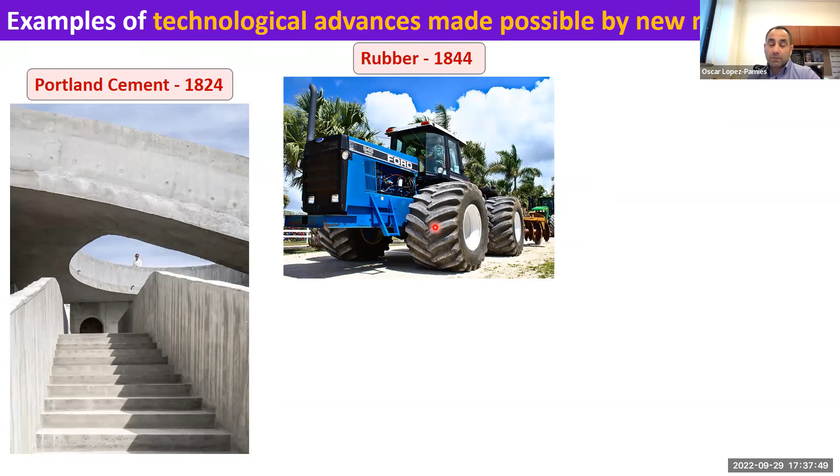Charles Goodyear discovered cross-linking back then, or at least that's when the patent was filed. This is just one example, but there are many examples where elastomers are being used and are enabling new technologies.

And maybe a more modern one is Gorilla Glass, which was invented in the 1950s, but with the iPhone, its application became more pervasive, and it's really everywhere. So, et cetera, et cetera, et cetera - these are just examples that illustrate this key point: in order for us to advance technology, typically we need new materials, or materials that are able to do things that we couldn't do before.

So this is really the driving force of our research. All of these examples have to do with mechanical properties. One can focus on other properties, electrical or magnetic, but the examples I showed you before dealt with mechanical properties. So in today's lecture, I'm going to mostly focus on mechanical properties, and in particular on fracture.

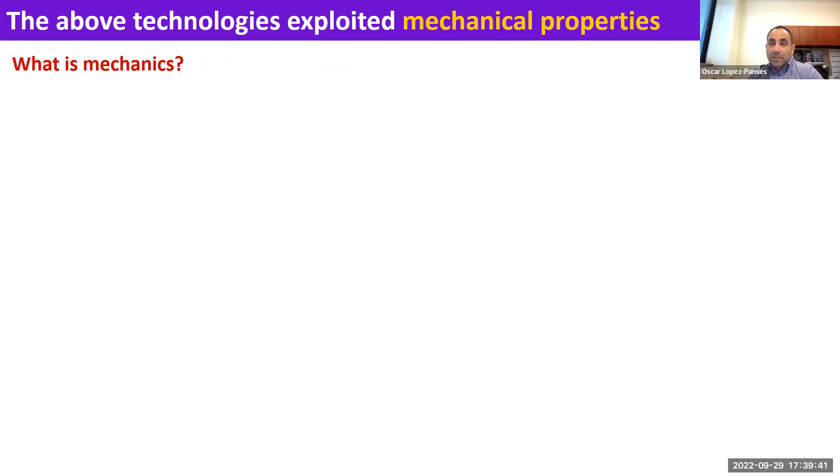And I thought it would be fitting to be careful and define what we mean by mechanical properties, and more generally, what we mean by mechanics, so that we are all on the same page. So what is mechanics? What is the thing that we're after? What is the behavior of materials that we want to understand and exploit to enable new technologies?

So, like with anything, one probably should start with the definition, and I'm going to call that the clinical definition: mechanics is the study of forces and deformations in matter. I'm going to show you a few pictures that all of us can relate to, and that's what mechanics is, really. If you go to Merriam-Webster or any other dictionary, that's roughly the definition you're going to find.

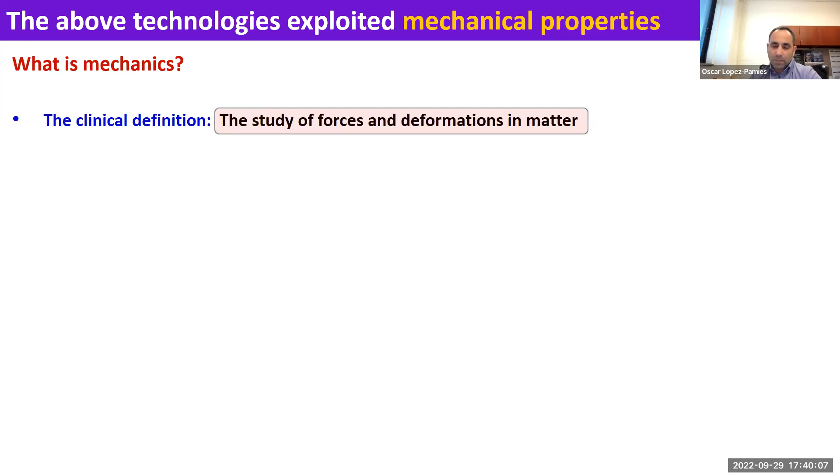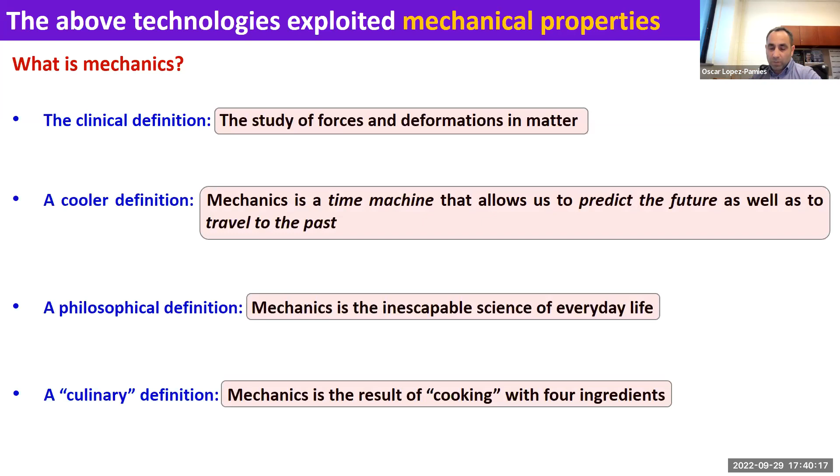But to actually truly understand mechanics in a deeper way, one can come up with more exotic definitions, and I'm going to go over 3 other definitions. This is going to help us understand at a deeper level what we mean by mechanics and why it's of interest to study. So the clinical definition again: the study of forces and deformations in matter. These are just a few examples - this is me stretching a rubber band.

I'm sure many of you do this, maybe even daily. This is just a very relatable problem where you take a structure made out of some material, you stretch it, you deform it, you apply forces, and it deforms. Mechanics is about understanding this process. Forces applied to matter induce deformation.

We can think about anything made of matter that is subjected to forces, which is pretty much everything. This is the Eiffel Tower, shown here with some artistic license, highly deformed, just to drive home this idea of deformation. Of course, the Eiffel Tower hopefully doesn't deform that much, but it deforms quite a bit.

When I was young, I used to play tennis, so I like this picture to drill down this notion of deformation and forces. This is a high-speed camera shot of what happens when you strike a tennis ball, which is a spherical shell, with a tennis racket, and you can see the very significant and complex deformation that takes place.

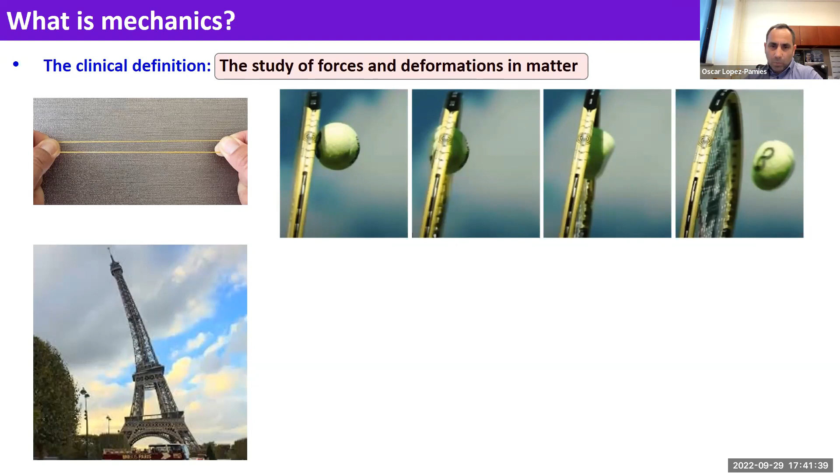One thing I'm going to focus on today is when you subject matter to exceedingly large forces or exceedingly large deformations, matter may fracture. It may crack, and then the structure breaks.

I included two pictures here. This is happy fracture - this is what you're supposed to do when you buy a yacht, you break a champagne bottle. I wouldn't know. And this is a less happy fracture - this happens quite often. So these are examples that structures are everywhere, and at some point they may break.

I'll come back to this point later.

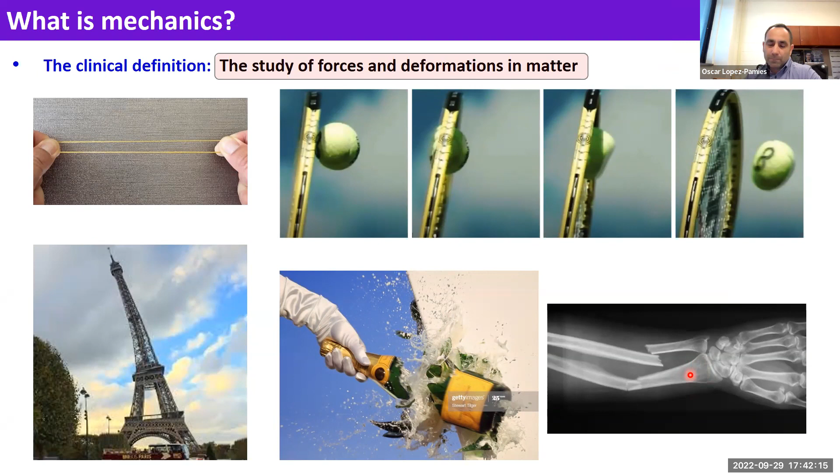All right, the second definition is related to why, more clearly than the first definition, we want to study mechanics. We can think of mechanics as a time machine, and we can think of any theory, if you like, as a time machine that allows us to go to the future.

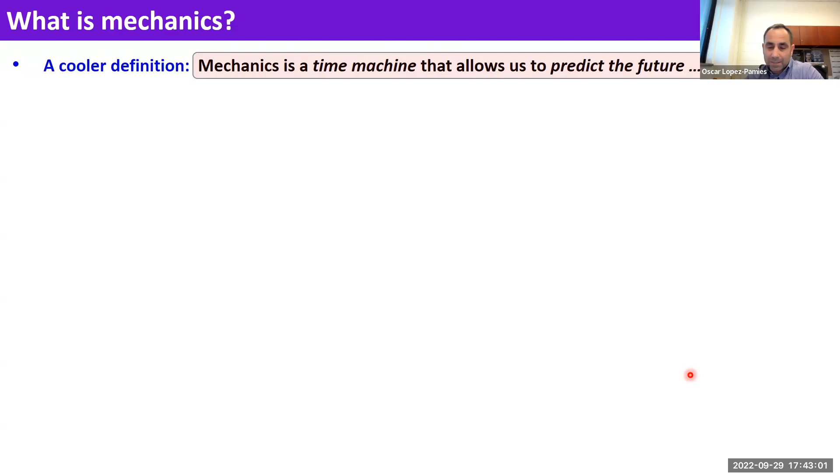If we have the equations that describe the mechanics of structures, certainly we can predict the future. We can figure out how things are going to behave before they are built, under any circumstance, and that's why we use mechanics to design whatever it is that we want to design. So we can think of mechanics as a time machine, and here's a couple of examples to illustrate this idea.

Can we predict the force required to break the dome? And if you break the dome, what is going to happen? How is the structure going to shatter, for instance? So this is the idea.

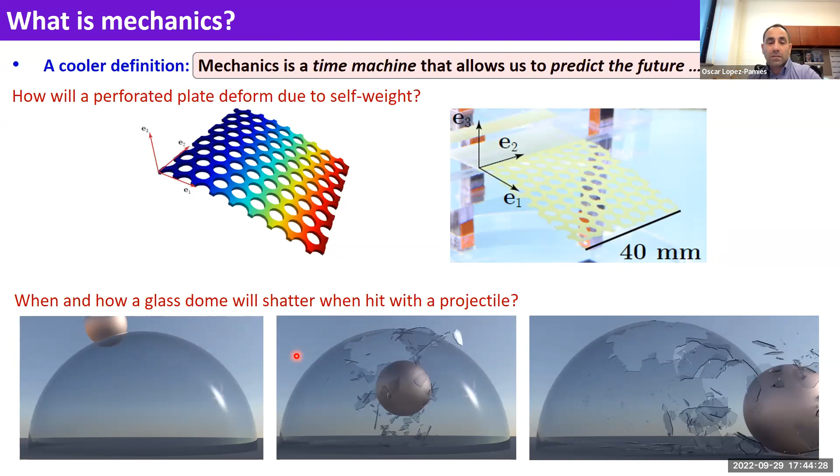If we have this knowledge, if we have a theory, a set of equations that describe how structures behave mechanically, we can predict the future. We can design structures for any purpose. That's the power of thinking about mechanics in this way.

Another very important aspect of thinking about mechanics as a time machine is that if we can go to the future, we can also travel to the past. And this is nothing but forensic analysis.

Whether we like it or not, accidents happen, and we need to figure out what went wrong so that it doesn't happen again. This is the collapse of a bridge not far away from here, the Interstate 35W bridge, next to the University of Minnesota in 2007.

The bridge collapsed and 13 people lost their life. And there was a huge investigation, as there's always an investigation in these cases, to figure out what went wrong, to see if there were other bridges in danger of meeting the same fate.

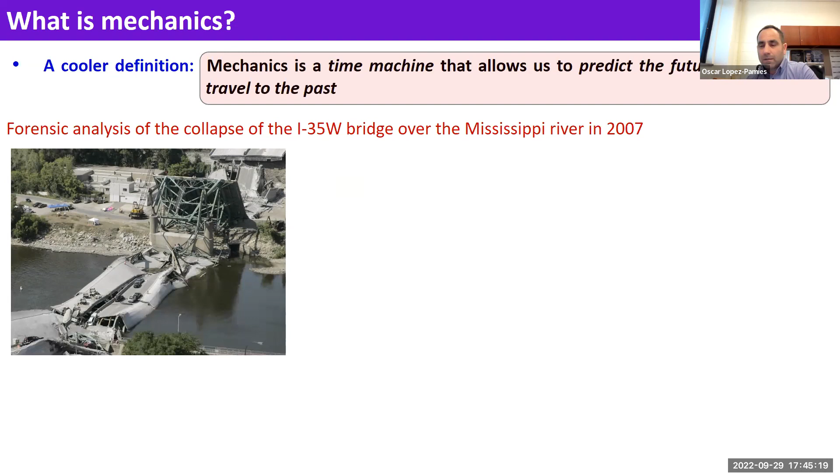And it turned out after a year and a half that they figured out what went wrong. What went wrong is one of the gusset plates was buckled during the fabrication of the bridge, when the bridge was put in place. And it was this buckled gusset plate that gave way and actually resulted in the collapse of the bridge.

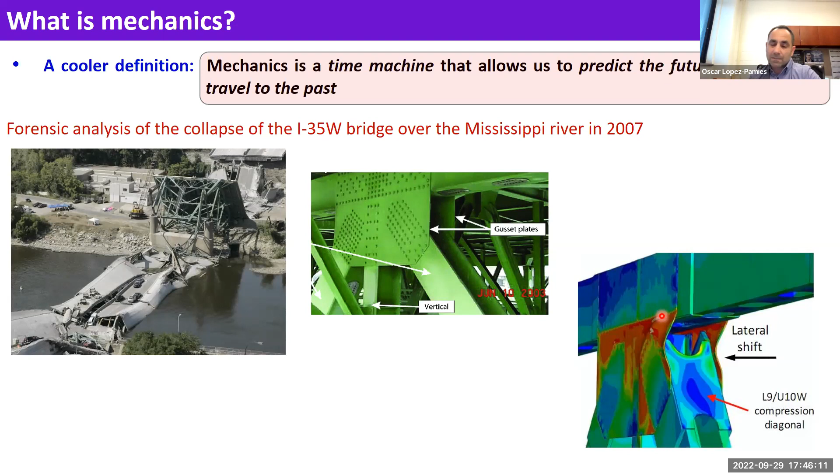This was possible because, as you can see here, this is a simulation. This was possible because we have the equations of mechanics for this structure, for this material, for this steel in particular, and therefore we can actually accurately, with equations, determine how this behaves. And that's how we can use these equations or this theory to go to the past and do some forensic analysis.

So I went through two of them, right? The cooler definition, time machine, now a philosophical definition. When one thinks about mechanics, we can argue rather philosophically that mechanics is the inescapable science of everyday life. And what I mean by that is that we are constantly surrounded by mechanics.

Here are just a few examples. I'm not going to go over all of them, but I'll go through one. You can read the others. Every time we take a breath, our lungs deform, they inflate, they deflate, right? That's mechanics right there. And everything that's around us is made of matter. Matter deforms when subject to forces, and that is exactly mechanics. So it's really truly we are surrounded by it, and that's why it is to our advantage to understand it.

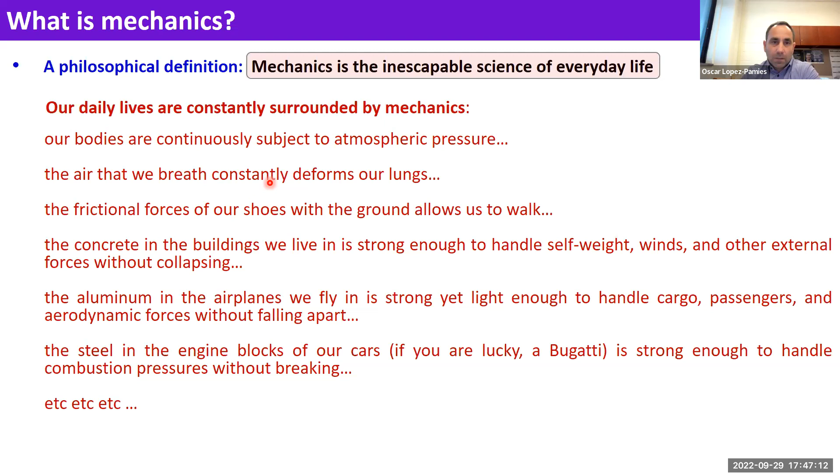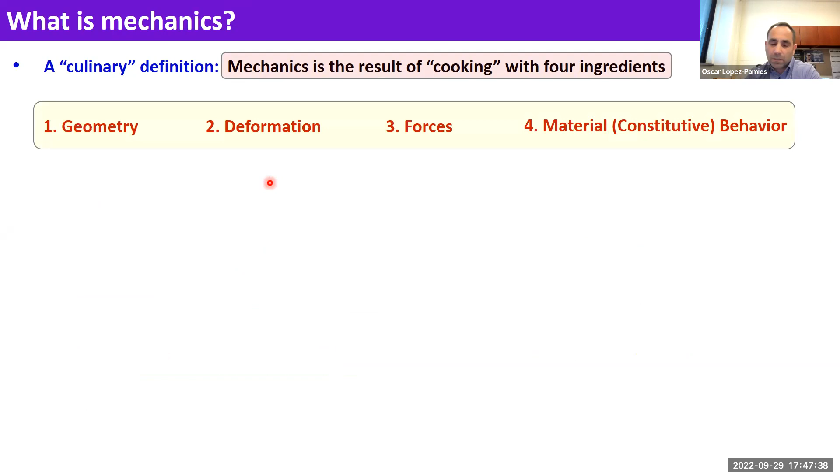And then finally, the definition that is going to get us going with fracture and the things that we've been doing is what I call the culinary definition. So mechanics can be really thought of as cooking, with 4 ingredients. So there are 4 ingredients. These are them: geometry, deformation, forces, and material behavior. And this explains what I mean by this.

If you think of your favorite structure, anything that is made of matter, you can think of something like the Eiffel Tower, a typical structure, or you can think of the human heart. Anything that is made of matter occupies a domain in space. So that defines its initial geometry. That is ingredient number 1.

This initial geometry deforms. And think about the rubber band. You apply forces, which is another ingredient. The structure with initial geometry deforms. And how it deforms depends critically on what material the structure is made of. So we can think of these 4 ingredients one at a time separately.

And as it turns out, we know now, we have understood completely, fully, the first 3 ingredients. There is nothing that we do not know about how to describe geometry, deformation, and forces. There is, however, an ingredient that, even though we have made quite a bit of progress, we really don't understand, not even close. I mean, this is where all the research is taking place. That is the 4th ingredient, material behavior.

How do we describe, with equations or with experiments, in a quantitative manner how matter behaves mechanically? When you subject it to an arbitrary load, can we say very precisely in a quantitative fashion how this piece of matter is going to behave? And that is actually a difficult problem. I'm going to be telling you a little bit about that, focusing on fracture, which is particularly challenging.

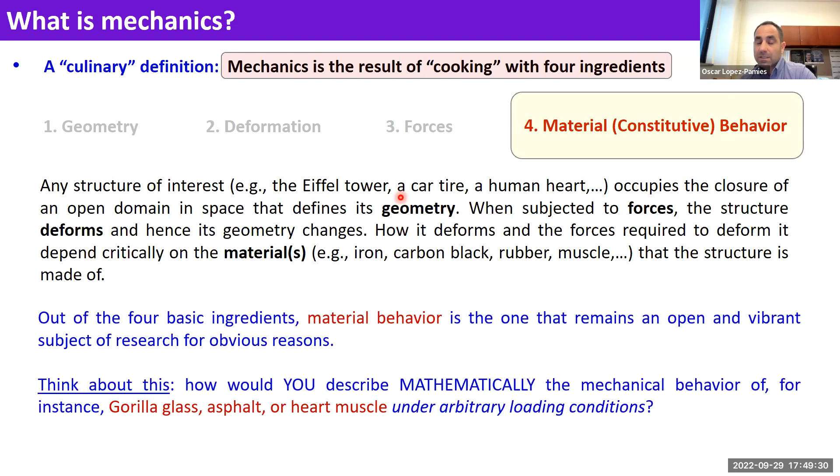So with that preamble, let me tell you what this presentation is going to focus on. It's going to focus mostly on the mechanical properties of solids that we use for structures. And in particular, we're going to look at the fracture properties of solids. And as I mentioned, this is challenging and it's going to become apparent, I'm sure it's already apparent, when you think about things breaking.

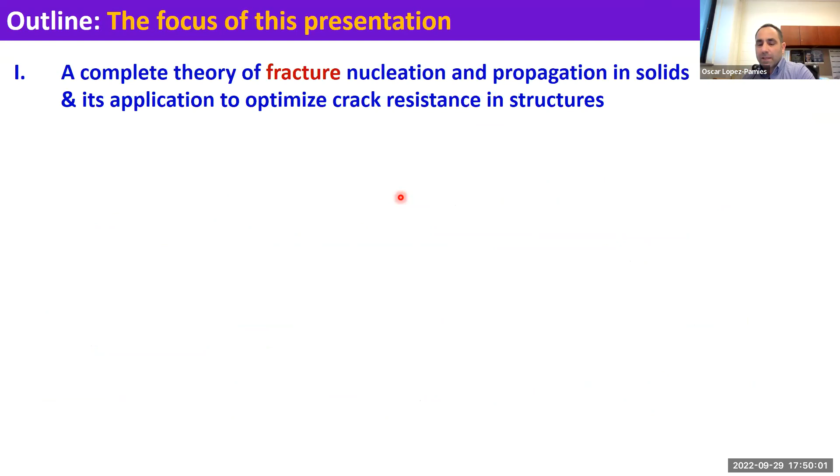Then I will tell you a little bit about some of the directions, these are different properties. So I'll tell you a little bit about solids that contain liquid inclusions and why these are very exciting materials and what is it that we can do with them. So these are the two examples. And finally, I'll tell you about a new program that is related to all of this that we have just started this semester here in the department, the EM(MA)T program.

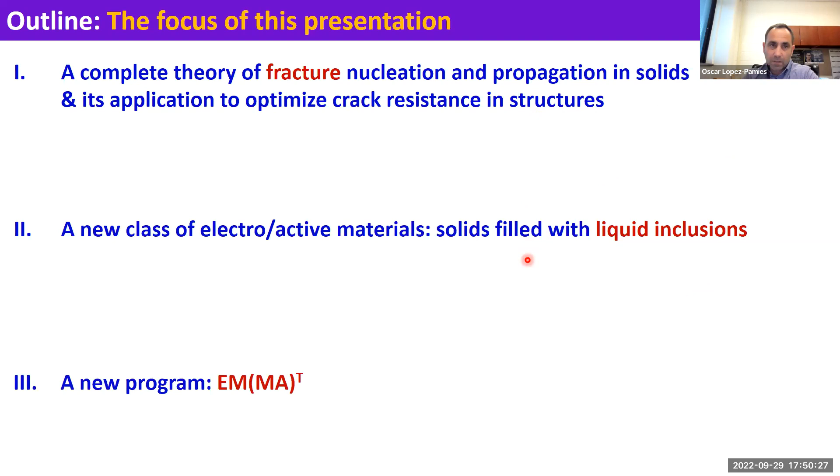All right, so the pervasiveness of fracture, I couldn't help myself. So I'm going to include again some pictures, but I really shouldn't, right? Because fracture is so very pervasive and it's so very familiar to all of us that it really doesn't need an introduction, but still, I couldn't help myself. And I included the following.

Benjamin Franklin famously wrote to a friend of his in Paris, where he spent a lot of time in Passy, serving as a sort of ambassador. In 1788, the US Constitution was ratified, and soon after, Franklin wrote the following, which has become famous: our new Constitution is now established and has an appearance that promises permanency, but in this world nothing can be said to be certain except death and taxes. This took off, and we still use it on many occasions.

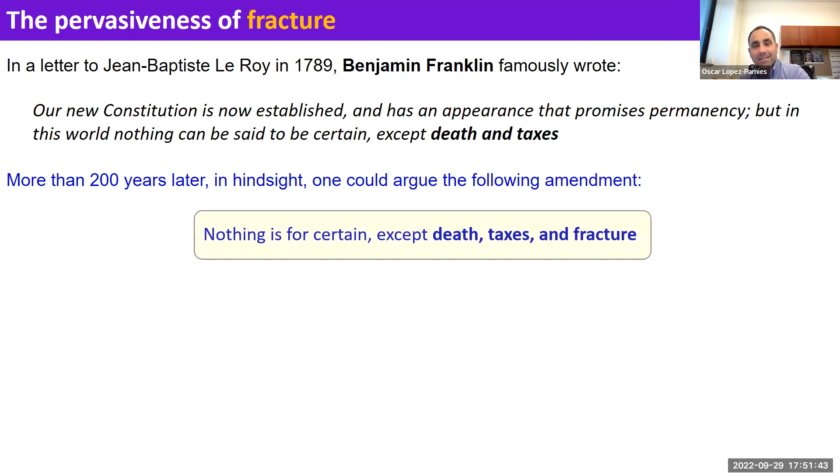More than 200 years later, in hindsight, one could argue the following amendment: nothing is certain except death, taxes, and fracture. And indeed, everything breaks. This is something exceedingly important for us to understand, and by understanding I mean quantitative understanding, very precisely.

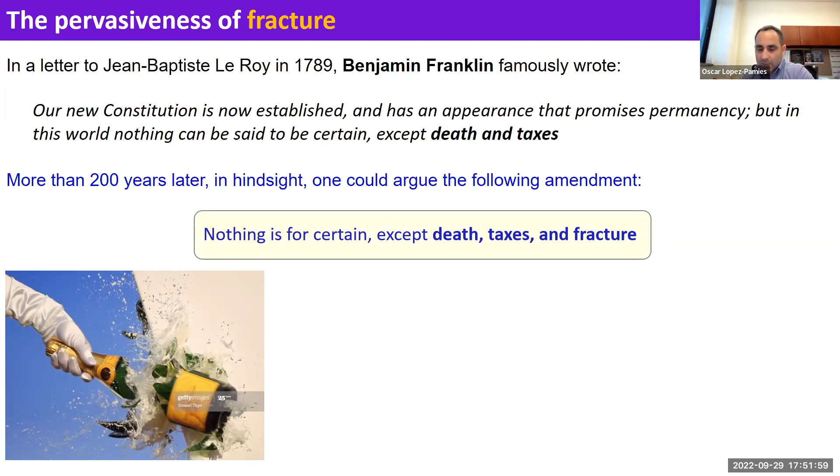So I already showed you these couple of pictures. Happy fracture, maybe not so happy, and this is certainly the other extreme of happy. Accidents happen. This was the fracture of a bridge. Six people lost their lives in this accident because of cracks in this bridge, which was at Florida International University in Miami.

But these are just three examples. You can think of infinitely many more. So fracture is an exceedingly important aspect that we truly want to understand.

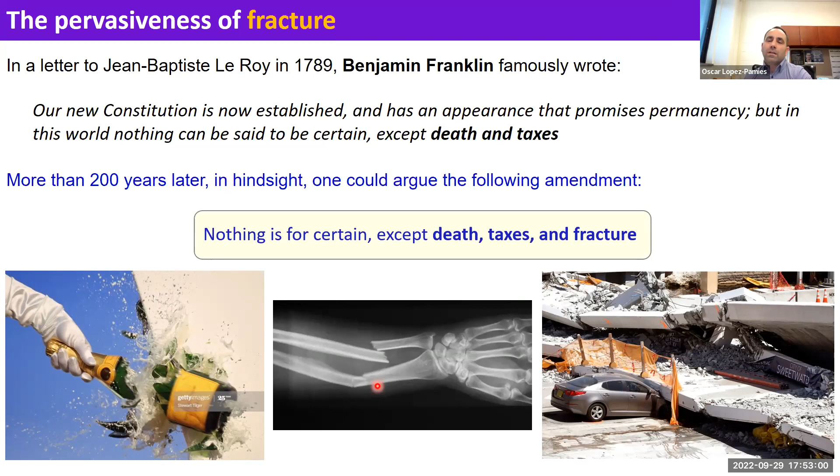So what I'm going to show you is our current understanding of fracture. We have recently developed a theory that we believe allows us to predict everything in terms of nucleation and propagation, at least in some classes of materials, brittle materials, but not only. Then I'm going to tell you what we can do with this knowledge, and how it can be used.

I don't want to be too technical, but I thought it would be important to go over how we developed the theory and the steps we followed to get there. For that, I'm going to show you what we know from experimental observations about fracture, which has been reported over many years, in fact more than a century. So I'll tell you about the key features of fracture, and then briefly show you a theory that can supposedly predict all those observations.

Something we can use to design or do forensic analysis. Then I will show you a couple of applications, and finally how we use this theory to design new structures that are optimized in some sense for crack resistance. All right, so the first view of fracture.

You may be familiar with a classical book by Love, published at the end of the 1800s on elasticity. There is a chapter where it's very nicely summarized what was the state of the art at the time about fracture. Just to put things in perspective historically, the notion of stress was introduced by Cauchy in 1823. Soon after, with a clear understanding of stress in materials and structures, people started thinking about what happens when things break.

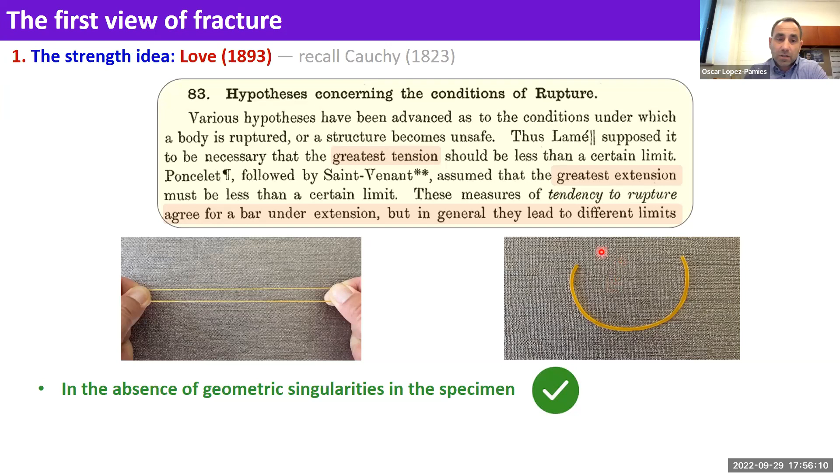They realized that this is great if there are no singularities in the structure. If you start to consider structures with sharp corners or with cracks in it, these fail miserably. The reason being is that if you have a geometric singularity in a structure, this implies that the stresses...

...are infinitely large at the singularity, right? If you think of a sharp corner, the stresses there, the moment you touch it, are infinitely large, which would imply that it should break right away, but that is not what happens, right?

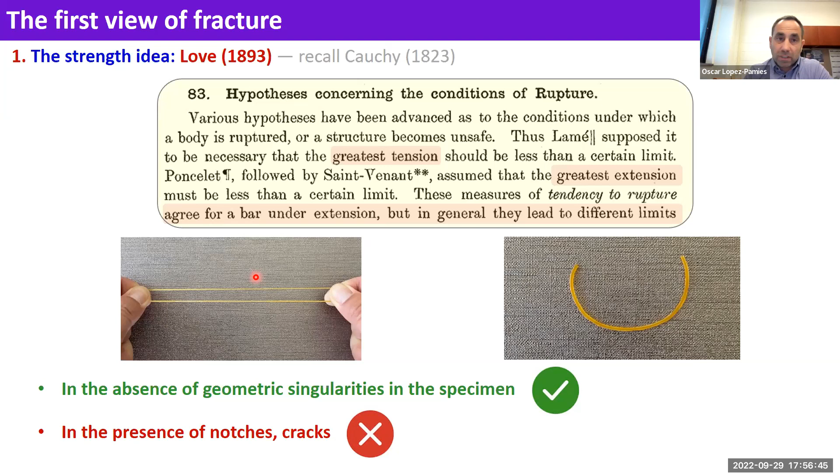So this idea worked, but only worked partially. This was in the 1800s. Then along came Griffith, in 1921, several decades later.

And then he said, actually, strength is not what happens. What happens is a competition of energies.

If you take a piece of material, the material may fracture or not, depending on a competition between energy of deformation and energy that is associated with the creation of surface.

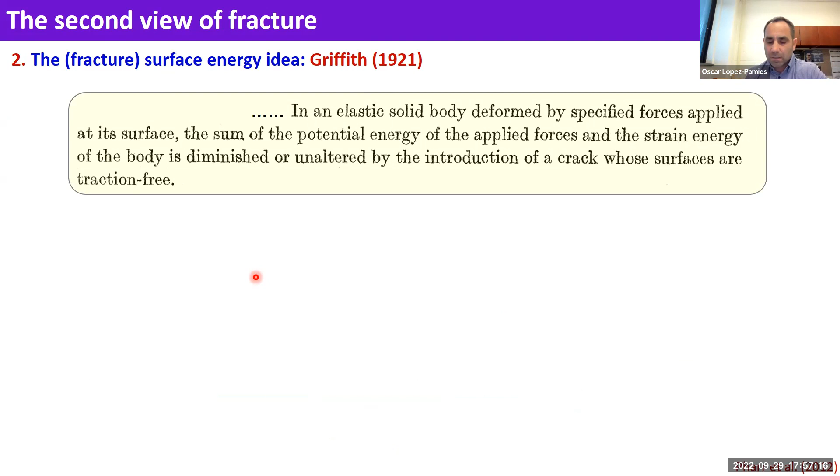And actually, this works great, but this only works great when you have a crack in the specimen. So think of a tape, think that you are going to cut it with scissors and therefore put a crack. This is a very singular feature, geometrically speaking.

And when you pull on it, at some point, the crack is going to run. And Griffith explains this.

So this is great, except that it's not so great because it's not explaining the previous case that I showed you about strength, right?

If you apply a force to a piece of material, let's say tension, it does not follow this. Fracture will not happen according to Griffith, it would happen according to strength.

So essentially what we have in this 1921 year is that we have two limits. What happens to a structure that has no singularities, geometrically speaking, that is strength. What happens to a structure that has a crack in it, that is Griffith. And...

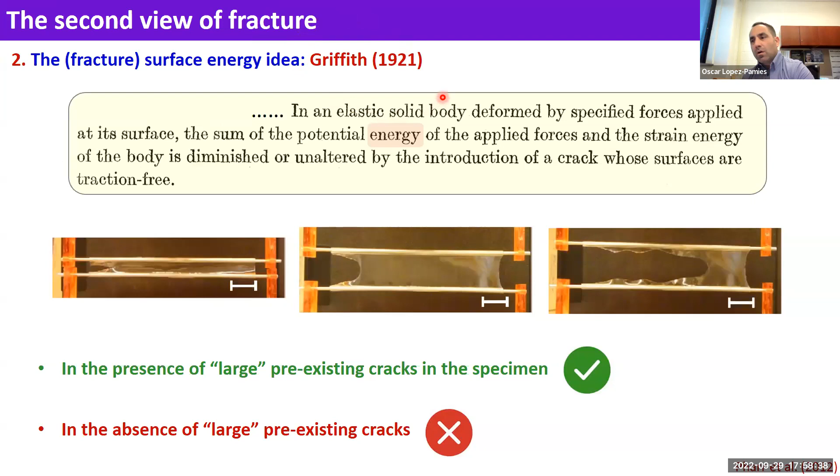Unfortunately or fortunately, the field of fracture focused on Griffith's idea, and for 80 years, that's where most of the work has been done, right?

But now, when we started to look at this problem, we wanted to look at the whole picture. So here I'm going to show you the whole picture, and I'm going to tell you where things stand now. All right.

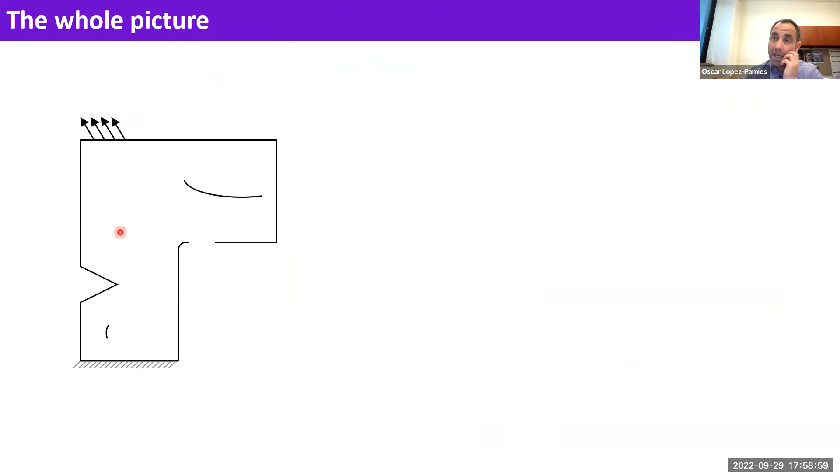So in reality, if you think of a structure, the following may happen. You may nucleate a crack in the bulk, right? Think of this as some sort of beam with a fancy geometry.

It is possible that you will create a crack because of the loads that you apply to it, in what we call the bulk, away from any geometric singularity.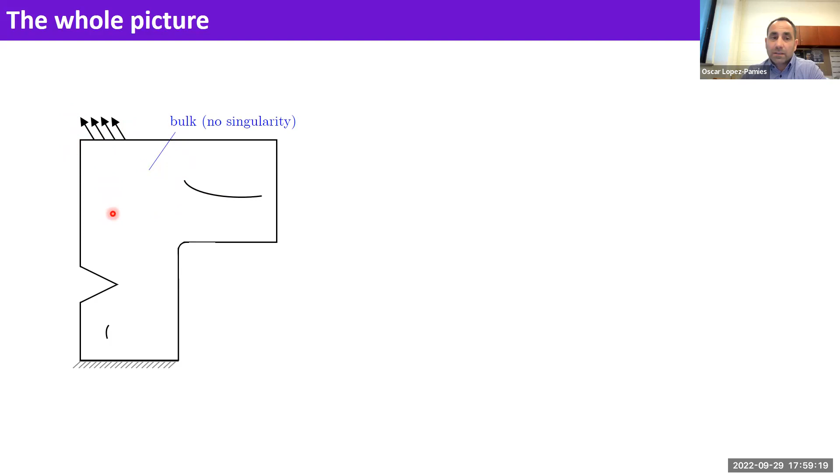But you may also have a large crack or many large cracks to begin with, right? Due to the manufacturing process, you may have cracks in the structure. So, well, you have to account for the fact that you may nucleate from a pre-existing crack, or you may nucleate from the bulk.

And more generally, you have to take into account that you may have corners, which are also geometrically singular, but not as singular as a crack singularity. And you may nucleate a crack from there.

Or you may have a rounded corner, which is not sharp, but the geometry is changing very rapidly, and you may also nucleate from there, or you may nucleate from the boundary that is smooth, right? All these things have been observed to happen.

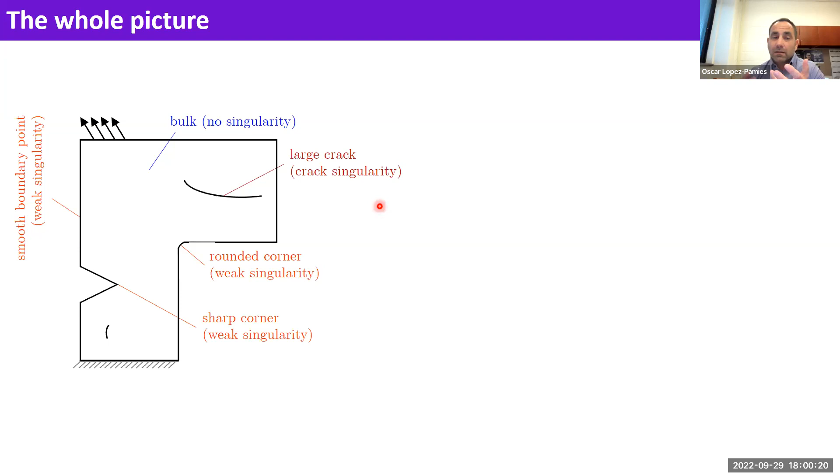So what we now need to think about is, when we think about fracture nucleation, how is it that we describe the entire picture? How do we account for the fact that nucleation of fracture can take place in many different ways?

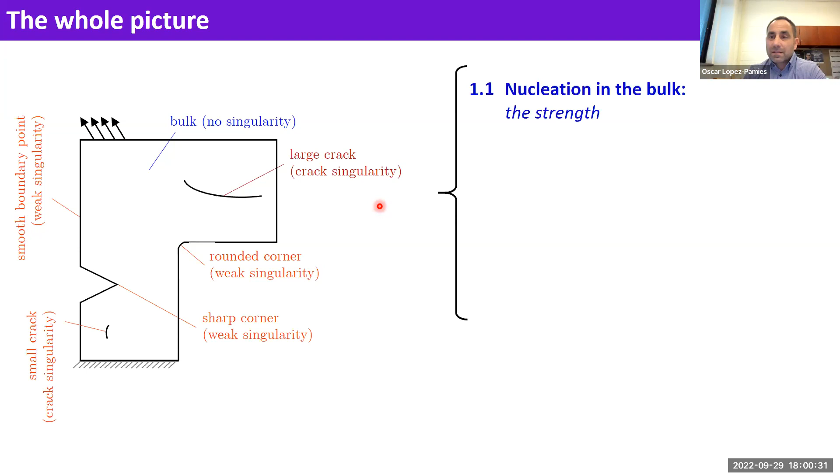Bottom line is the following. What we know now from experiments is that nucleation in the bulk is controlled by the strength of the material. Nucleation from large pre-existing cracks is controlled by the fracture energy, or if you like, Griffith, right? These are the things that I showed you before. These are just experimental observations.

And then anything in between really is a transition zone. It's like there is a mediation between these two limits.

So we should think about this as two limiting cases. Anything in between is an interpolation between the two. This has to do with fracture nucleation, and then, of course, after nucleation you may have propagation.

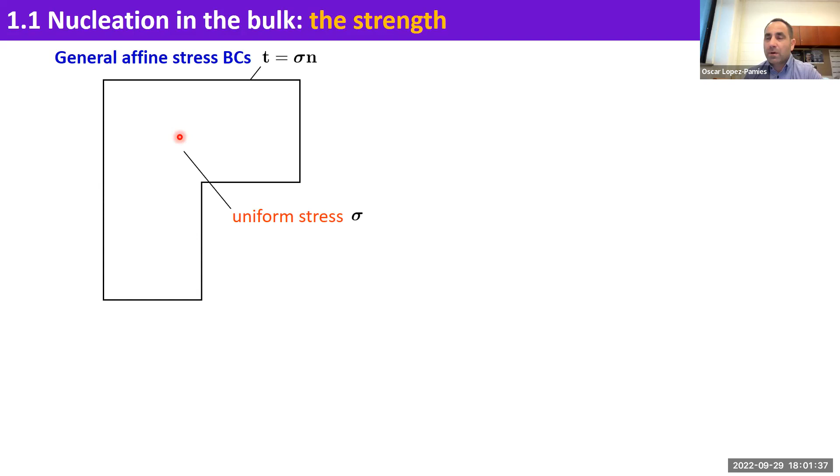This is a bit more detail about what is the strength. Strength can be described as a surface in stress space. If you take a structure and subject it to a uniform stress, at some point it's going to break. But stress is a tensor, a quantity that is not scalar. It has many scalars in it, let's say 9 scalars. So you need to worry about whether you do tension or shear or a combination of other things. And that means that what you have, strength, is a surface.

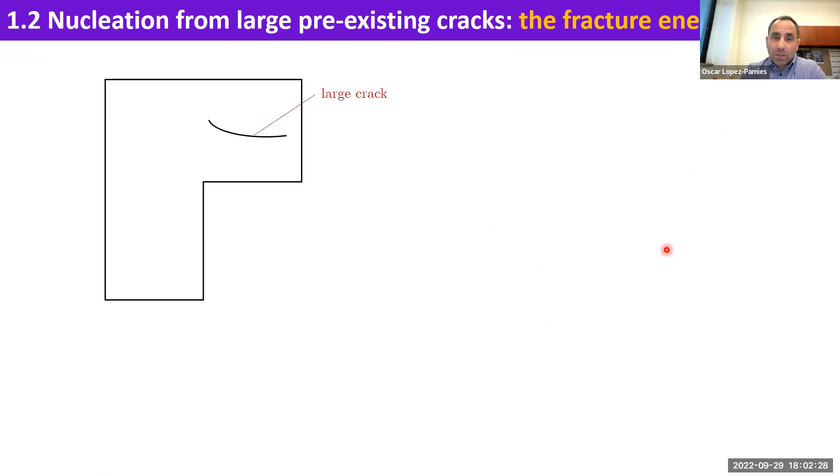And this is just a characteristic of the material that you need to account for, because this describes how fracture nucleates in the bulk. Then from a large pre-existing crack, this is well known, and this is Griffith fracture. By large, I mean materials, when you look at them with a microscope, have defects. What large means is that this crack has to be much, much larger than the inherent defects. And if that's the case, we know from experiments when the crack is going to propagate, when it's going to nucleate from the crack front that is pre-existing.

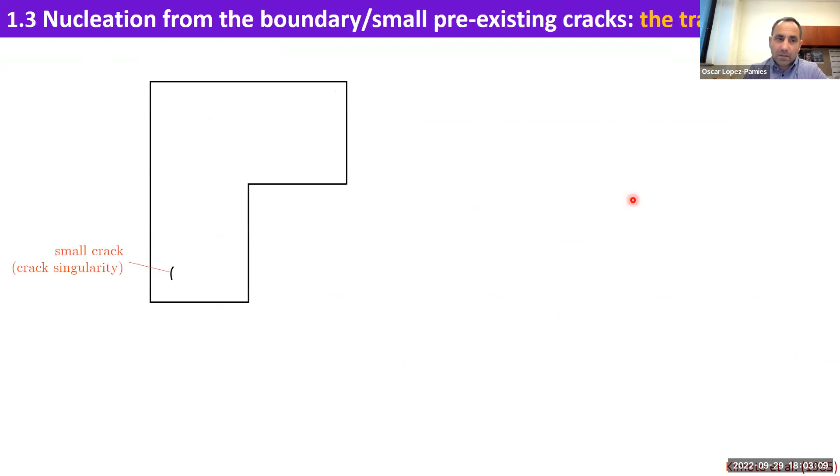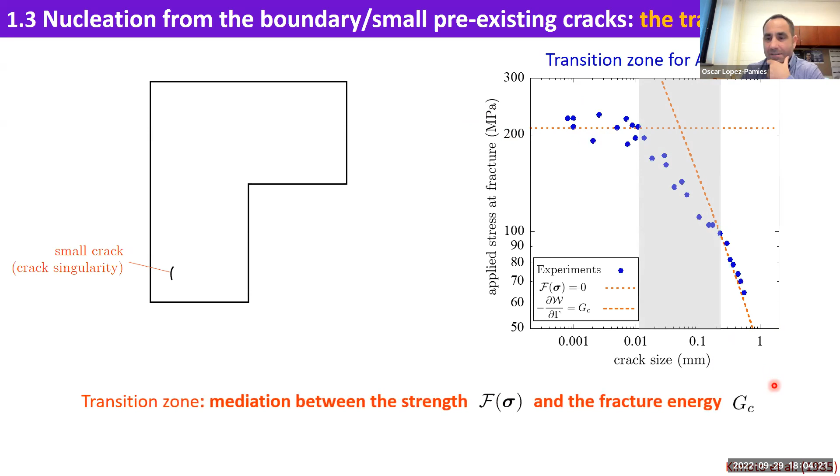So this is what we know from experiments, and all there is for us to do is—well, the propagation of fracture is also Griffith. This we know from experiments, so we know nucleation, we know propagation. So what we need to do is realize that if we hope to have a complete theory, where you look at a structure which possibly contains pre-existing cracks, corners, or whatever in arbitrary geometry, and subject it to arbitrary loads, can we write down equations that will tell us under a general scenario of loads and geometry when fracture will nucleate, and how cracks will propagate.

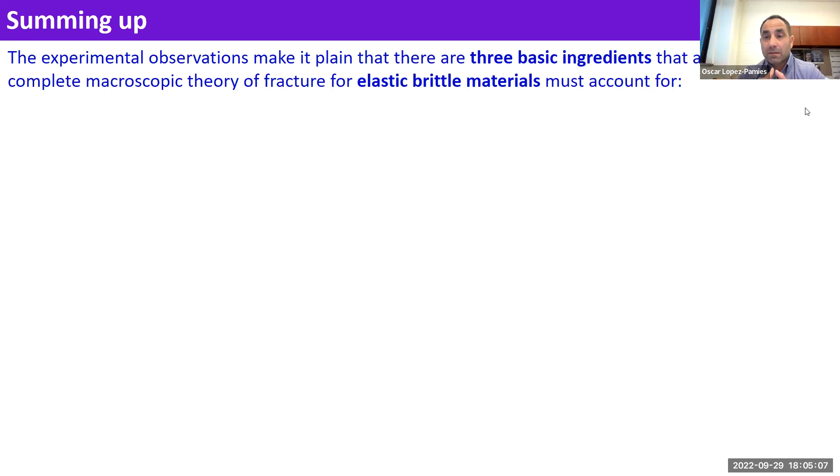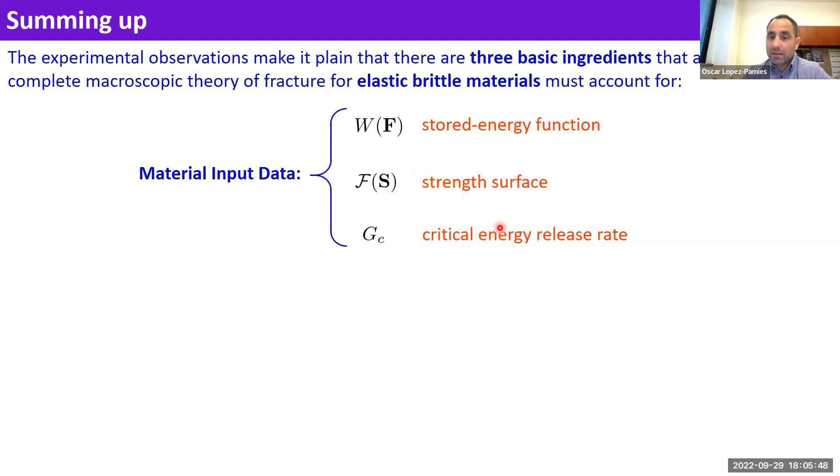I'm not going to go through the details of how we developed such a theory, but here is one such theory. Many things were done before us that we benefited from, and I'm pointing out the great work of Gilles Francfort and Jean-Jacques Marigo in '98. But that in itself is incomplete and needs to be generalized. This is what the generalization looks like.

I don't want to talk about the technicalities, but the message is that now we have equations that take as ingredients the elasticity of your material, whatever that may be. It takes into account the toughness of the material, whatever that may be—those things are measurable from experiments. And this quantity here takes into account the strength. So all these ingredients that are absolutely necessary to have a complete theory enter here.

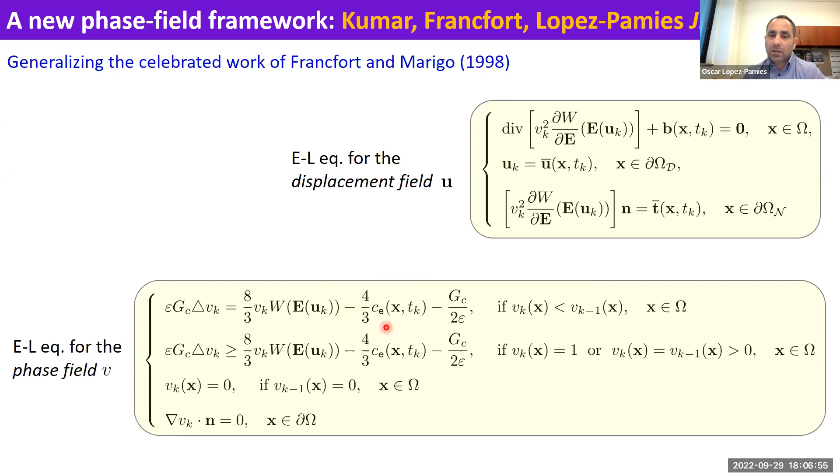And then we can go and see what the theory predicts. We have done comparisons with many experiments on many materials, and so far everything has checked out. It seems to indicate that these equations may indeed provide a complete theory for fracture nucleation and propagation, at least in materials that can be considered elastic brittle.

I'm going to show you a couple of examples—Doug, please keep me honest with the time—a couple of examples that are very challenging, and you can see what the theory is predicting. One of them is indentation of glass.

Think of, I don't know, bulletproof glass. How is glass made bulletproof? Or think of these hammers you encounter in trains—if there's an emergency and you need to break the glass to exit, you have these little hammers with pointy tips that are supposed to allow you to break the glass. So this is the kind of problem we're going to be looking at.

Another problem is, think of your car tire. Car tires are very fancy structures—essentially they are made out of particles, carbon black, that's why they're black, embedded in rubber. And what happens is that there is fracture that takes place inside this. These are just two examples to illustrate how the theory fares with reality, and I picked these two because they are particularly challenging and have not been explained until now.

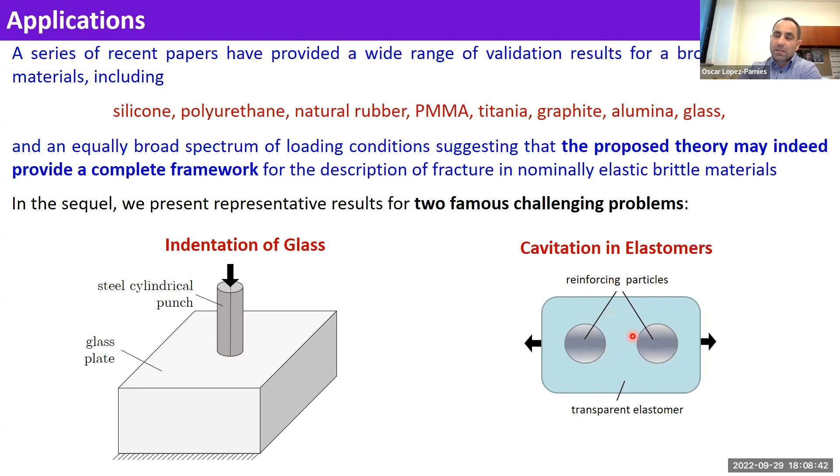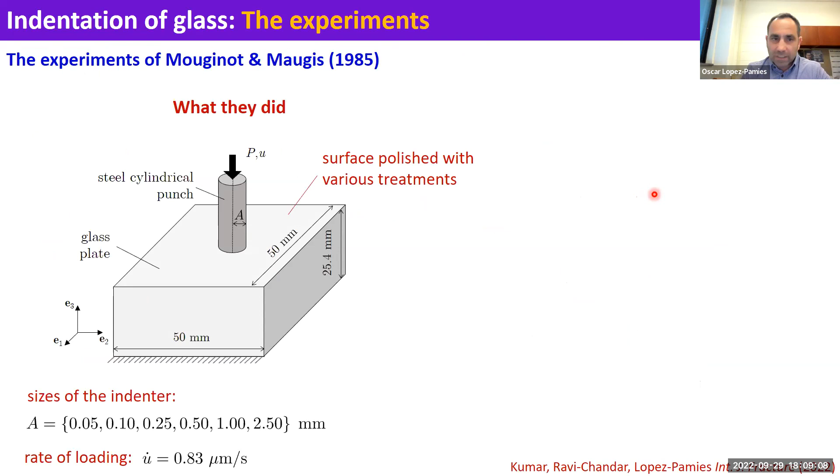Back in the 80s, Mouginot and Maugis made careful experiments where they were controlling what type of glass they were indenting. These are the details of the geometry and the indenter. They take a metallic indenter and apply a force, and what happens is this.

At some point, if the force is sufficiently large, cracks nucleate as ring cracks. And if you continue to apply load, these ring cracks turn and become cone cracks. This is how fracture nucleates and propagates in glass due to indentation.

So what people have understood for decades now is that if they take the nucleation as given, propagation is already known to be controlled by Griffith—once you have a pre-existing crack, Griffith tells you what happens with the propagation. The problem has always been, how do you nucleate the crack? That is a challenge: how do you have a theory that gives you nucleation?

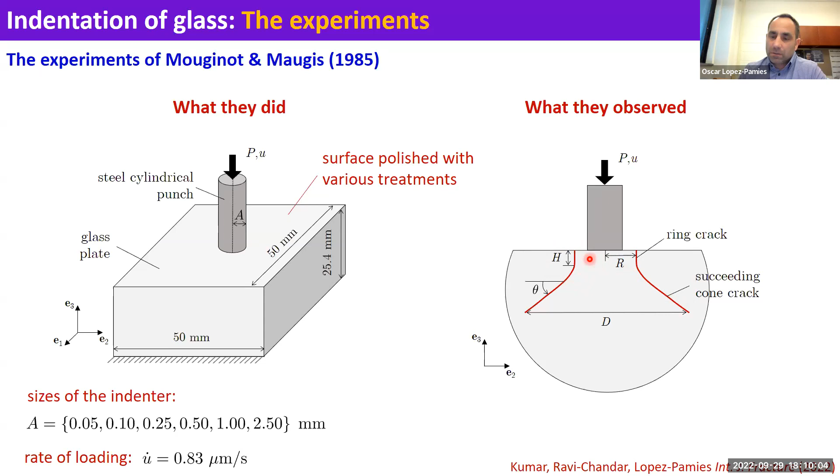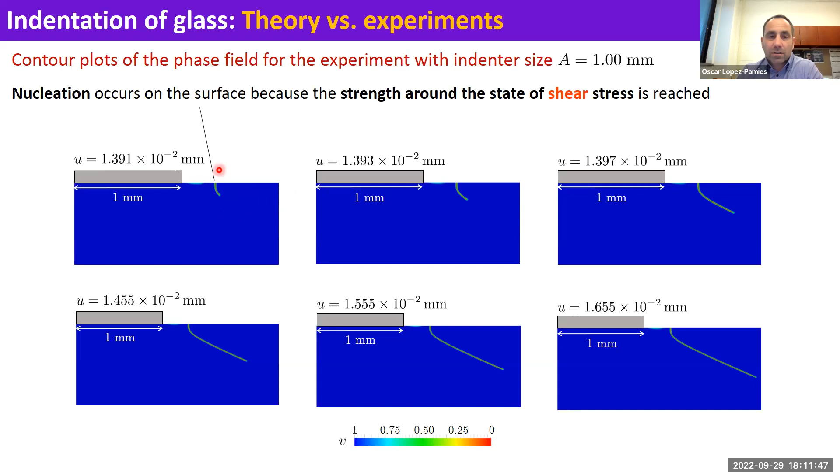The reason is that nucleation is controlled here by the shear stress, the shear strength rather, of the glass. That is what is actually being exceeded, and that is what triggers nucleation. It's not tensile strength, as many people believe. It's actually shear strength that controls nucleation. Once you have nucleation, up you go, you have propagation a la Griffith.

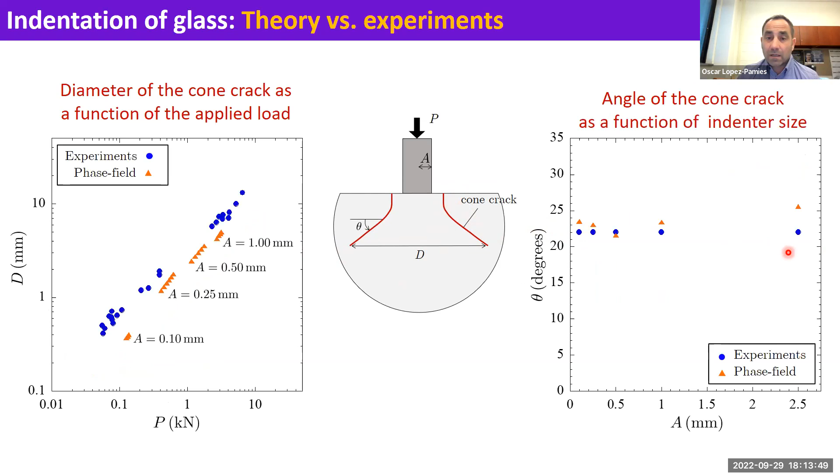These are other comparisons, quantitative, for the location at which the ring crack appears. And this is for the propagation, right? The diameter of the cone crack and the angle at which the crack propagates. So all of them seem to check. And so we are pretty pleased with these comparisons because they suggest that the equations describe reality.

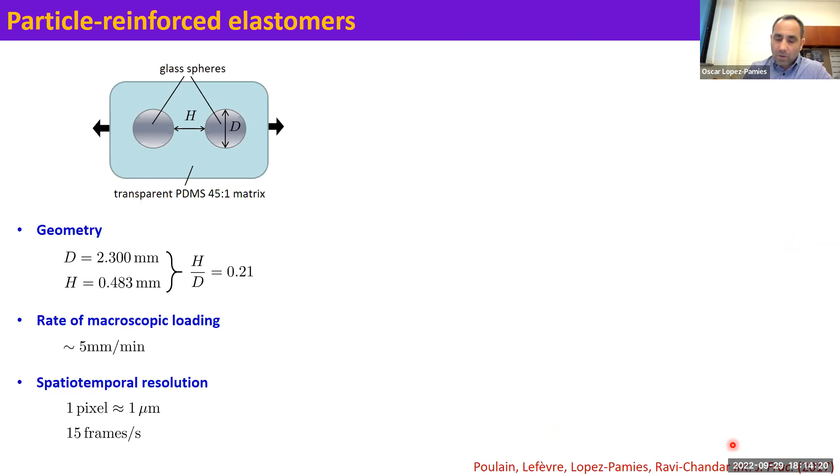All right, particle reinforced elastomers. This is another very challenging problem that has not been resolved for many, many years. So I'm going to show you some experiments that we did with a collaborator at UT Austin, Ravi-Chandar, who's probably, I could say, arguably one of the best, if not the best, experimental mechanicians right now. So I'm going to show you a movie of the experiment, and then I'm going to show you the simulation of what happens.

So these are glass beads. You think of them as something very stiff that you embed in a matrix, right? This is a typical type of microstructure. You can think of concrete, you have aggregates in cement paste. It's typical to add fillers to a matrix that is softer. In this case, the matrix is an elastomer that is transparent, some sort of silicone, so you're able to see through. So this is actually the silicone, and these are the glass beads, or the reinforcing particles. They're very stiff compared to the silicone.

So I'm going to play the movie. What we are doing with this specimen is simplifying, in the sense that you only have two particles instead of many, but they're very close to one another. You can see here the dimensions. So what happens is that you are going to nucleate a crack near one of the poles. That's a crack, but it doesn't look like a crack because we are looking at the deformed configuration. So when you deform a penny-shaped crack, and this penny-shaped crack is between something stiff and something soft, it deforms asymmetrically.

If we continue to apply the load, what happens is you have a secondary site of nucleation. And if we continue to apply the load, actually what happens is this crack is going to grow a lot and it's going to push this one away. So that is what happens. And then boom, that's a beautiful movie.

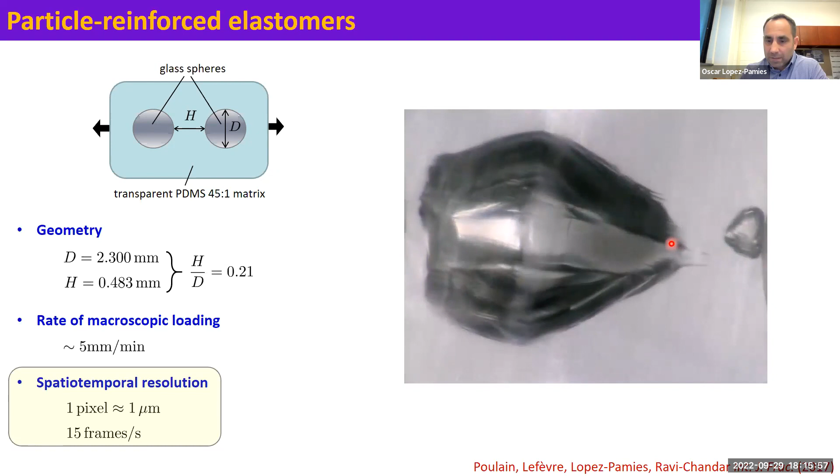And then what happens when you remove the forces is this. So these are still pictures of that movie. Essentially, you have nucleation, propagation, secondary nucleation. Then this secondary nucleation of a crack takes over, and this one goes away.

Once you remove the forces and zoom out, you can see the particles here. And you can see that indeed, it's now a penny-shaped crack, right? We're looking through the material. So this is nucleation within the bulk, right? And this happens in your car tires, by the way, all the time. But that's a different story.

So you have healing, right? But I will not get into that today.

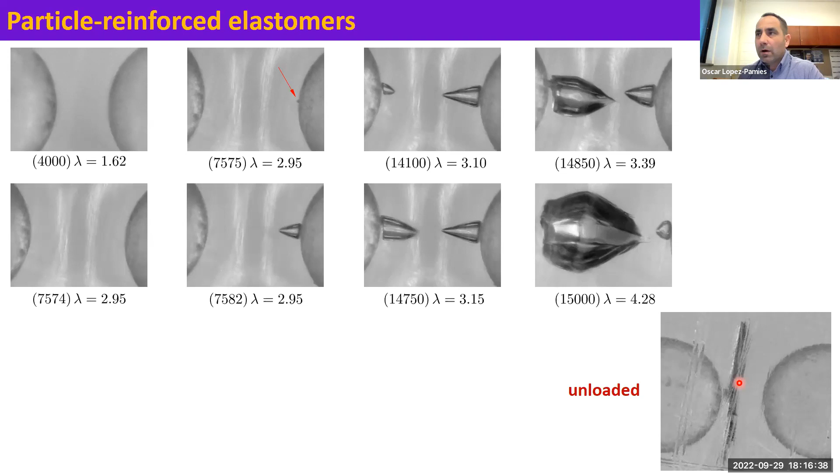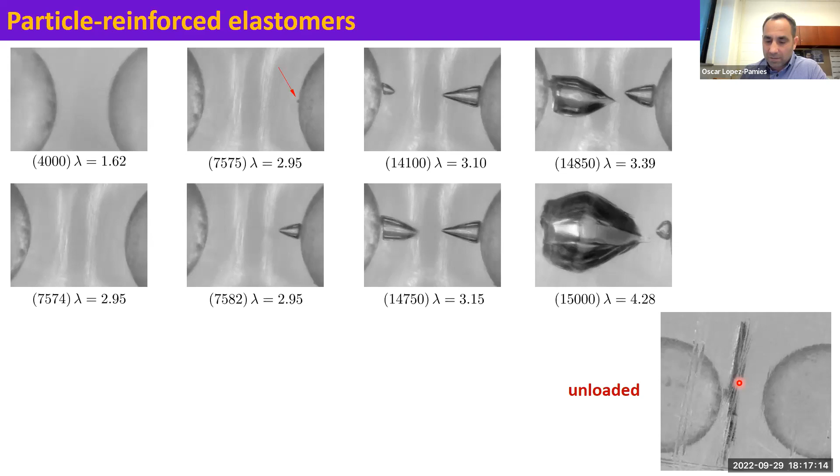This is just an example of fracture nucleation in an elastomer, which is essentially an elastic material that, therefore, is brittle. So elastomers, contrary to what you may think about the word brittle, are perhaps the most brittle materials on the planet, because they are able to deform elastically. And after that, they do nothing else other than create surface. They fracture. They do not undergo plastic deformation like metals and some other materials. So from that point of view, the elasticity is nonlinear. But other than that, they're perfectly brittle.

All right, so let me show you the simulation. And you will see what the theory is able to do, right? It's pretty much right on what happens in the experiment. So you have nucleation, propagation, secondary nucleation, and these are the stretches. Lambda is the amount of stretching that you're applying to the beads. And so here again, it's a very different material and a very different type of nucleation and propagation, but the equations seem to describe what happens in reality.

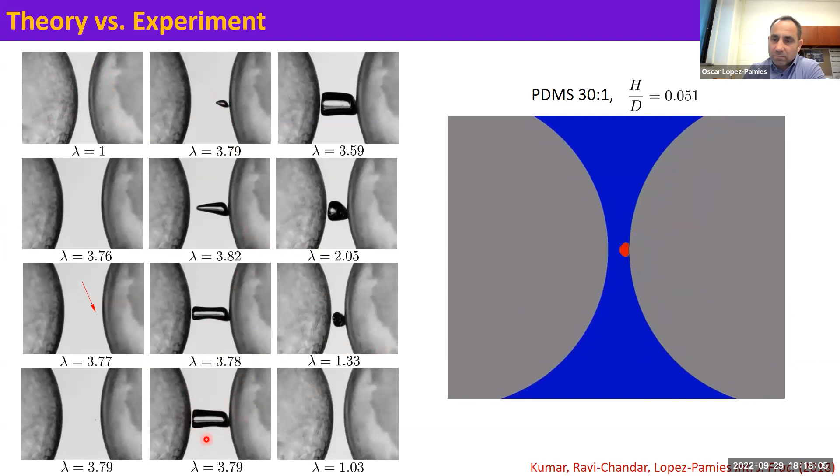This is just another one of the experiments. In this case, the particles are closer to one another, so you only have one event of nucleation. And because things are very close, the deformation is even more dramatic. It's conical and then becomes cylindrical, but this is nothing but a penny-shaped crack.

All right, so these are just two examples. We have done comparisons with many other materials and many other geometries. And so far, everything seems to check. And so we're still working on that. But we are pretty encouraged about what we're able to do with these equations, essentially describing nucleation of fracture and propagation of fracture very accurately.

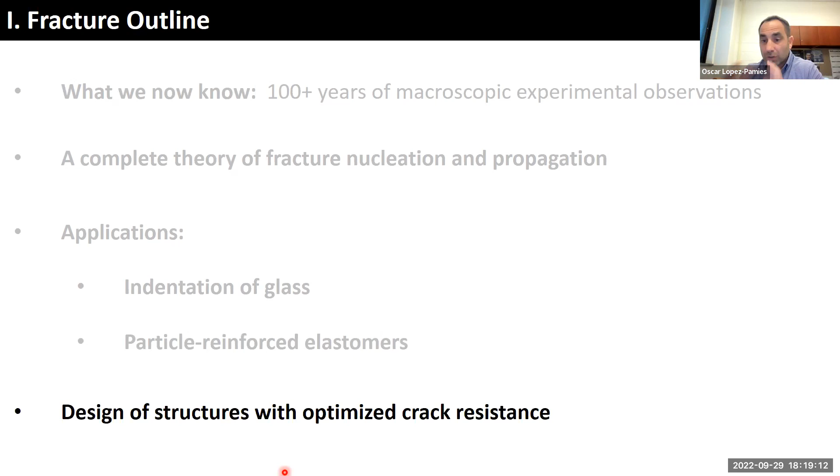So obviously, if that is true, one of the directions that one can think of is, okay, can we now design structures with optimized crack resistance, right? Now that we have these equations, we can use them to do whatever we want. And this seems certainly one of the directions that is exciting, right? Can we design structures that behave in a way that even in the catastrophic case where they are going to fracture, they're going to fracture in a way that we want? So that we can control, if you like, the catastrophe in some sense.

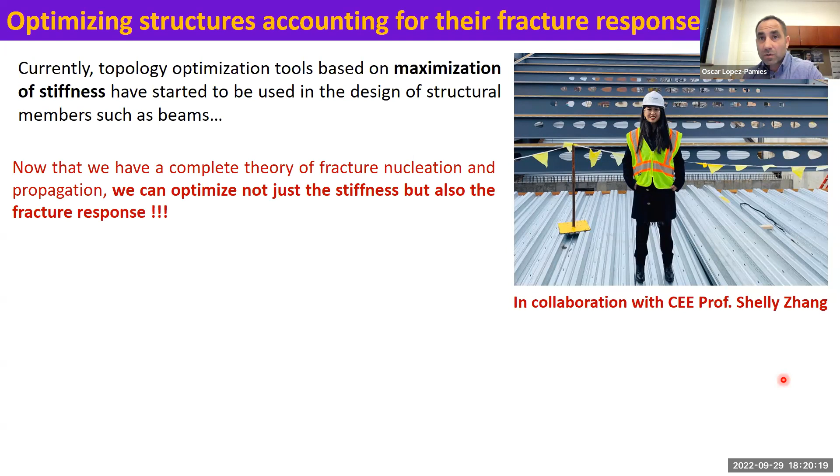Now, until now, what people have done in this field has been to design structures that are optimized, but only in elasticity, right? In this case, you are maximizing the stiffness of these structural members, in this case, beams. Now that we have a more general theory, the natural thing to do is to account not just for the maximization of the stiffness, but also to design and optimize how the structures, how beams or whatever, behave in the event that they were to fracture.

And then you can think of several scenarios. I'm mentioning here two of them. Maybe what you want to do is design structures that are going to perform elastically in some way, and they are going to delay the nucleation of fracture as much as possible. At some point, everything is going to break, but can we optimize that? Can we create a geometry, a structure with a given geometry, that essentially optimizes when fracture will occur?

Alternatively, you may want to design a structure that may fracture—cracks may develop—and what you want is to develop a geometry that will absorb the maximum amount of energy through crack propagation. When a crack propagates and creates surface, it dissipates energy. So in the event of something collapsing, you want the structure to take as much energy as possible, so that people inside the structure don't take that energy. That could be a different direction of optimization, and we are currently working on this project. It's very exciting.

I guess I could show you. Let me do this—I don't know if you can see it, but she gave me things that she 3D printed. This is a beam with some optimized microstructure, making use of the theory and topology optimization, and this is a tested beam. We are testing them to see whether what we expect is going to happen in terms of performance of fracture.

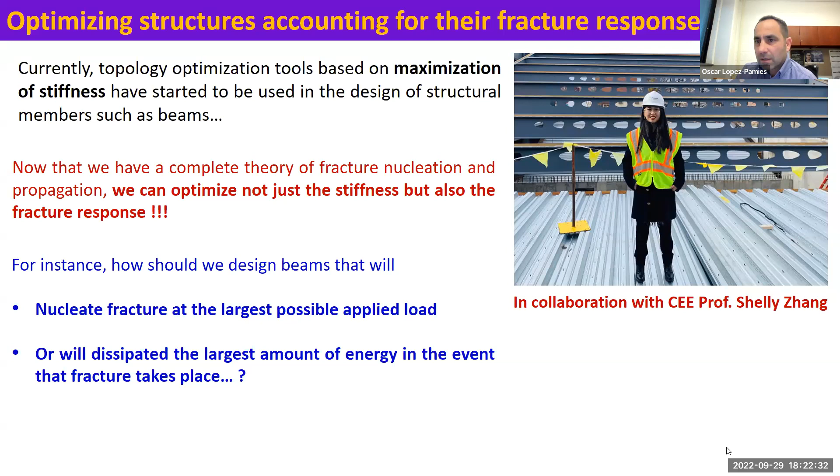Okay, very good. So very quickly, I don't want to go over time. I mentioned a couple of other things. That is as much as I plan to say about fracture.

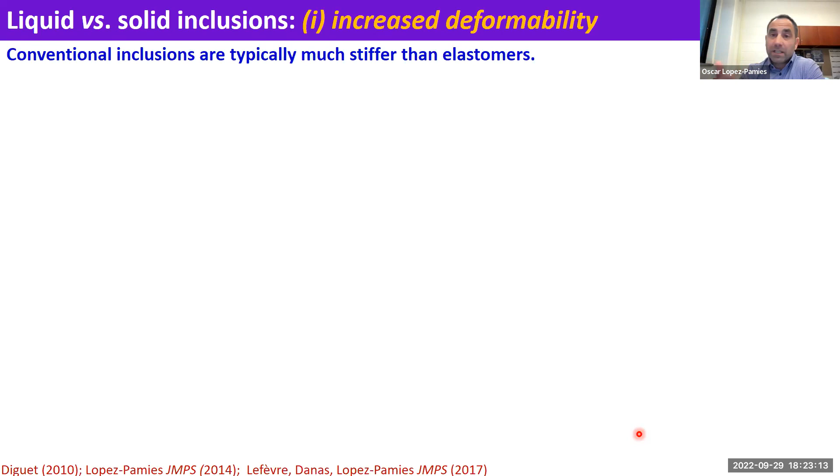So another direction that I thought I'd mention, because it's pretty cool, is this notion of: can we obtain or create new materials with new properties by making use of liquid inclusions? Let me remind you that typically when we have inclusions—think of concrete, think of a car tire—the inclusions that one adds conventionally to improve material properties are solid particles, and typically they are stiffer than the surrounding matrix. So I'll mention an example and tell you about the idea of using liquid inclusions and why that may be beneficial.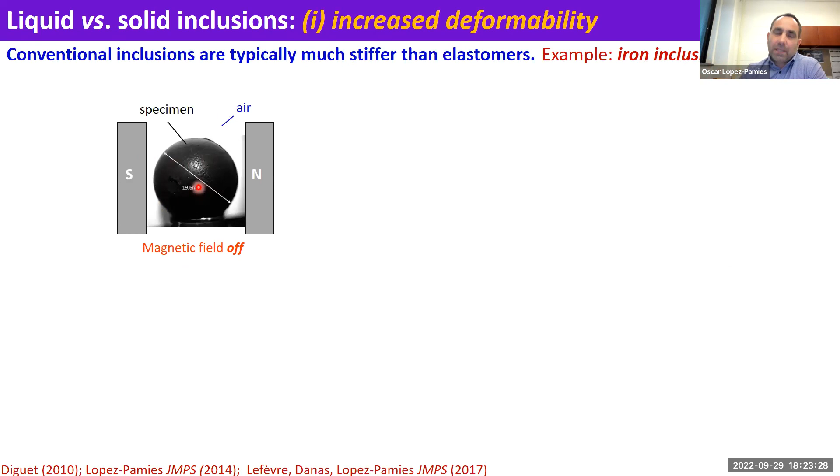This is just an example—this is a piece of rubber, a so-called magnetorheological elastomer. The matrix is rubber, which is not sensitive to a magnetic field, but you can put iron inclusions in it, and this is an example of that. The idea people were pursuing about 20 years ago was: maybe we have an actuating system here, we can apply a magnetic field, and the thing will do something for us. Then maybe we can think of applications, and certainly people have thought of applications. It's nice to actuate something with a magnetic field because it's a non-contact technique—you apply a magnetic field without touching the specimen.

So what they saw was not much. This is an experiment where the magnetic field is very significant—more than 1 Tesla, which is a lot—and the deformation is very tiny. The reason is that iron inclusions are stiffer than the surrounding matrix. By having them there, you do two things: you make the material sensitive to magnetic fields, but you also make it stiffer, because the iron doesn't want to deform.

So alternatively, if you want something sensitive to magnetic fields, you can use ferrofluid inclusions. These are essentially oil, or a fluid—typically oil with nano iron particles. This is sensitive to magnetic fields because of the iron, but it's a fluid, and therefore it deforms a lot. If you run a simulation with ferrofluid inclusions as opposed to iron inclusions, you get very significant deformations, which for some applications may be what you want. So the idea is that with liquid inclusions, as opposed to conventional solid inclusions, you increase deformability, or you may increase deformability.

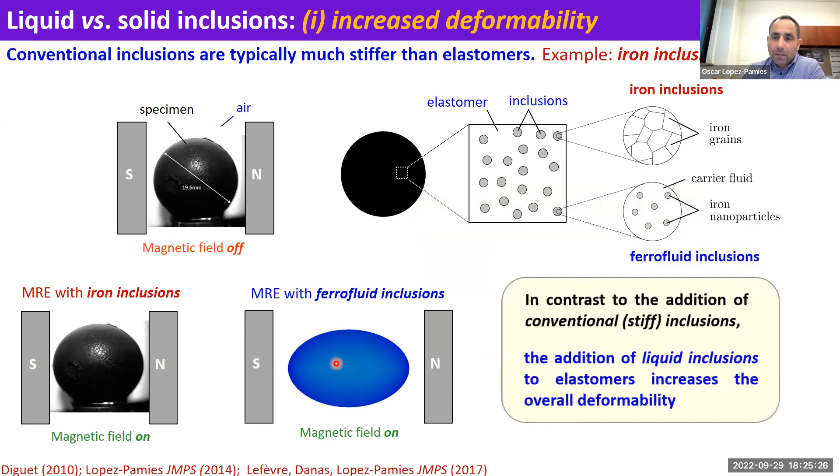The other aspect that is perhaps even more interesting is that when you have a fluid inclusion, you have to think about interface mechanics—think of surface tension, which may play a role. In fact, there are recent experiments showing that interface mechanics for some systems with liquid inclusions control the entire mechanical response. This is just one example: here the matrix is silicone, and the inclusions are glycerol, which is a sort of polymer, but a liquid. Let me show you what happens.

This is indentation of a block of material containing liquid inclusions. By changing the stiffness ratio—let's put it this way, by changing the size of the inclusions or the surface tension—you may end up with systems that are stiffer than the matrix, or softer than the matrix. So let me say that again: the inclusions are liquid, think of water, but if you make them small enough, the interface becomes stiff, because spherical inclusions want to remain spherical—because of the surface tension.

So when you try to deform them, they're going to push back, and they're going to result in a reinforcing behavior. Even though the inside of the inclusion is liquid and you can deform without a force, it is the fact that you have an interface that resists deformation that brings reinforcement.

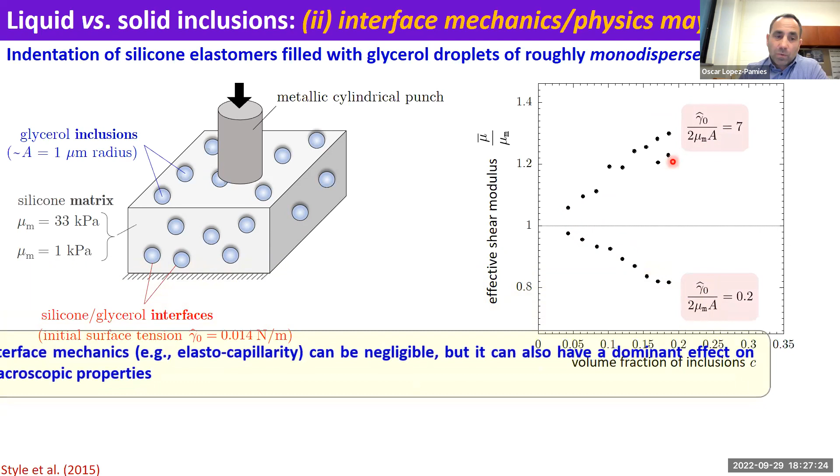So you can end up with a very wide range of behaviors depending on what you do with the surface tension or the initial size of the inclusion, from softening to stiffening, and in fact, to what we call cloaking. These are simulations, comparisons with experiments.

Cloaking means that you may have a system where even though you have inclusions, you have neither softening nor stiffening, but it would behave exactly as the matrix without the inclusions, even though the inclusions are being deformed. So what this is telling you is that you can actually cover a wide range of behaviors, from softening to stiffening to cloaking, by playing around with liquid inclusions, their sizes, and their interfaces.

So now you can think that if you're going to make the inclusions ferrofluids or metallic liquid metal inclusions, that's a very hot topic right now, you can start to explore all kinds of properties, and this gives us a way to really create materials with novel behaviors that, again, may help us enable new technologies.

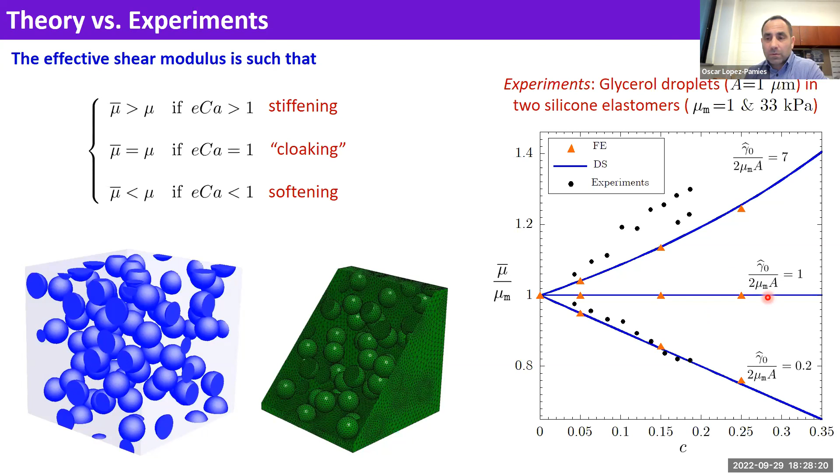All right, so what is this? As I tried to convey during the presentation, technological advancements happen mostly because we have new materials that enable us to do so. And therefore focusing on that will allow us to go to the next generation of technologies.

So I'm not going to get into these examples. I already mentioned these, smart materials that respond to magnetic fields, but there are many others. These are just some simulations of systems where you apply an electric field. So I think with the things that I showed you before, I hope I made the point clear, and just to make it very clear that the sky's the limit essentially.

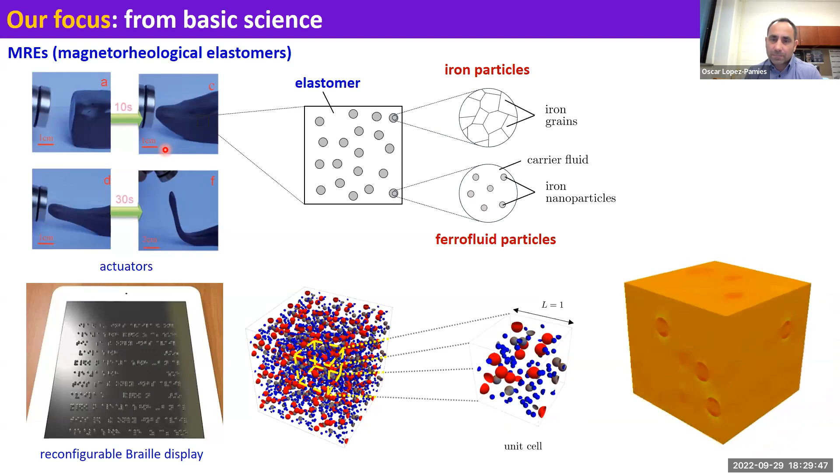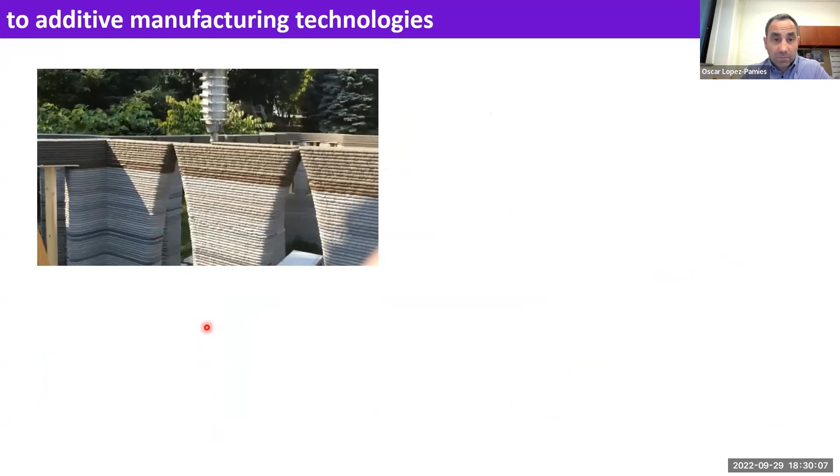So our objective is to go from basic science to additive manufacturing technology. Essentially, can we create new materials with the properties that we want? And can we manufacture them to put them out there, make it into the real world and make the world a better place? And this is just a couple of pictures of 3D printing of concrete, something that some of us are starting here.

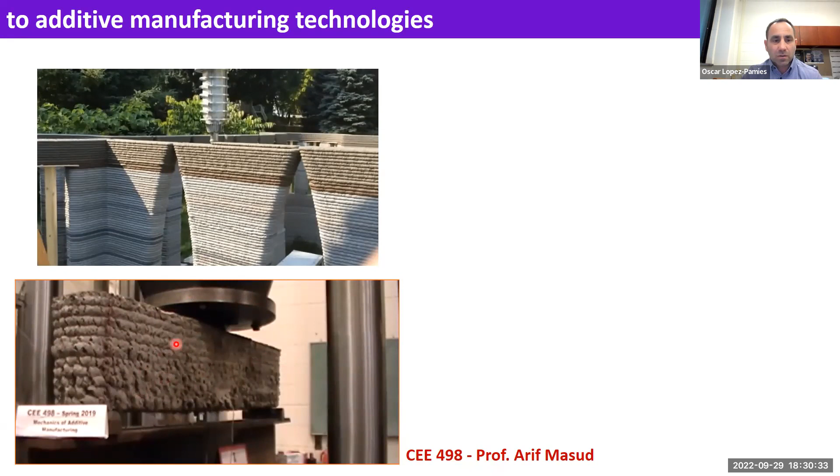In particular, I wanted to show you this movie, credit to Professor Arif Masud, who actually has developed a course in additive manufacturing. And this is a 3D printed beam that is being subjected, during this course, to compression, and you can see that fracture develops there. So these are the kinds of problems that we are thinking about, and I already showed you this optimization.

So the idea is to really understand materials from a fundamental point of view, so that we are able to create them through advanced manufacturing techniques and use them.

So I just point out why do we want to do this? Well, beyond the fact that that's where my heart is, it makes sense because I think we are uniquely positioned. We in the department are more than 15 faculty with expertise in material synthesis, modeling, testing, and 3D printing across all areas, not just in structures, but across all areas. And I think that makes us uniquely positioned to attract top talent to lead this effort nationally and internationally.

So with that, I thank you for your attention, and would be happy to take any questions.

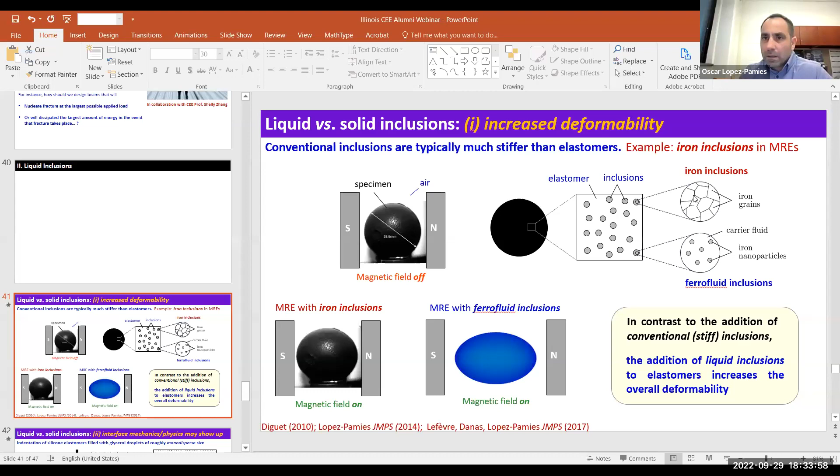That's a very good question by Martin: how do you want to deal with scattering experimental data relative to your deterministic curve? That's an excellent question. We are now looking into that, and experiments clearly indicate there is a lot of scatter. I suppose I can share the screen and make the point a bit more clear. Let's go to the scatter. It's a very important point.

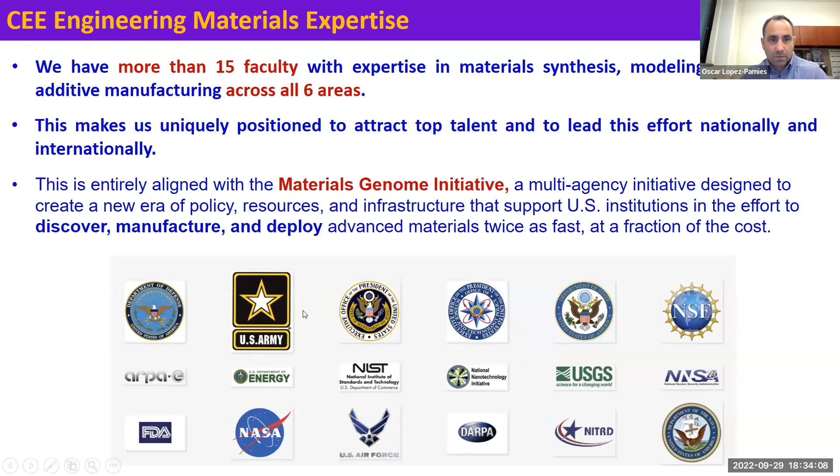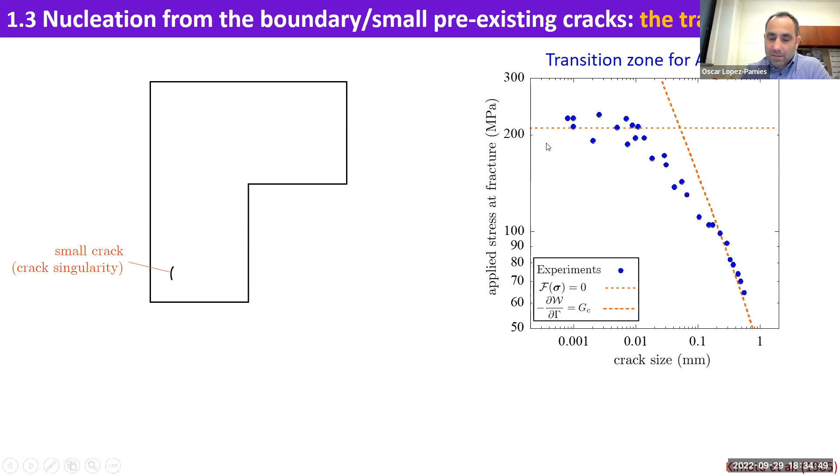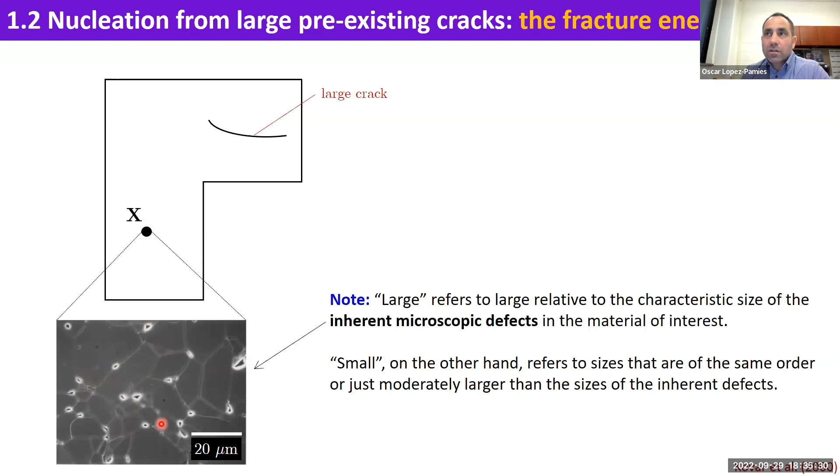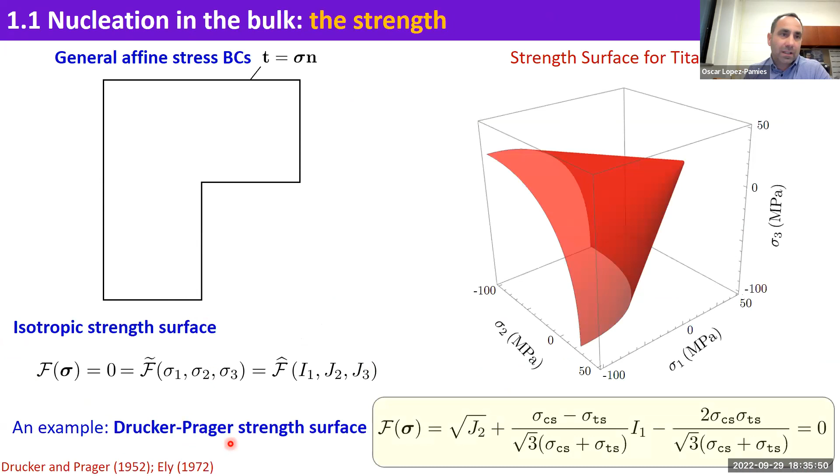So it is because of this that strength is stochastic. One has to model strength stochastically. This is not a deterministic surface in stress space, it's actually a stochastic one. And you have to inform this from a realistic point of view. Even for a given system, we should get a handle on the stochasticity. Certainly that's something that has to be accounted for, and that's work in progress.

Definitely, that is a very important aspect. The things we have done so far, if you think about the experiment with the glass beads, the right glass went before the left, even though it's almost symmetric, but not exactly symmetric. That is because of stochasticity. So we have done things that are very simple, but certainly this needs to be informed with more sophisticated stochasticity inputs. But that can certainly be done, it has to be done. I hope that, Martin, answers the question.

Thank you. Have you looked at inclusions that have different thermal conductivity than the surrounding material, also using inclusions to dampen out vibrations?

Okay, so you refer to, Mark, do you refer to the fracture problem, the inclusions in the fracture problem? Yes, to confirm. Mark? Okay, yeah, maybe there's some problem with the sound, but I'm gonna assume so.

This is something we are looking into, the things I showed you. Okay, so what do you mean? Oh, you mean for the liquid inclusions? Is that right? Yes. Okay, so yes.